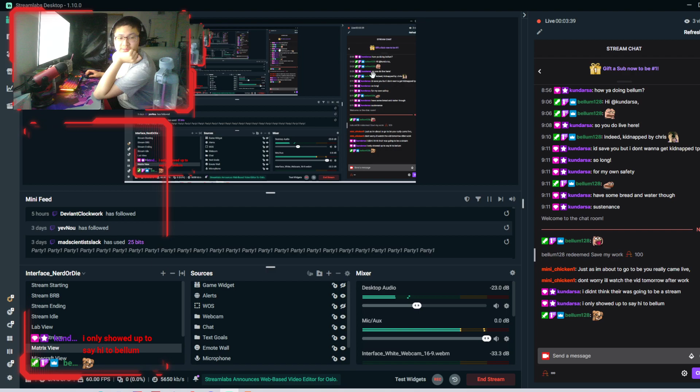There we go, that's the wrong view. That's the wrong camera, I forgot to change my camera. Okay, hi.

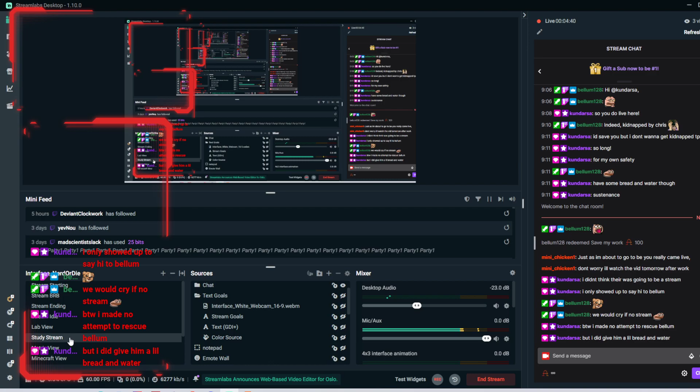Alright, let me just fix my everything. What's going on here? Why am I not displaying the right thing? What is going on? Right, because my other one is using that webcam. Setup stuff be like...

Yes. I'll fix that later. I made no attempt to rescue Bellum, but I did give him a lil bread and water. You're making this sound like I kidnapped Bellum, and he's not here by his own will. Making it look like a bad thing. Why isn't this... okay.

Yeah, change the screen, and then... what do you mean I admit it? Alright, my webcam's in the correct location now, everything's relatively fine. He's gonna CAD a jail cell. Is that what we're doing today, making a jail cell for Bellum?

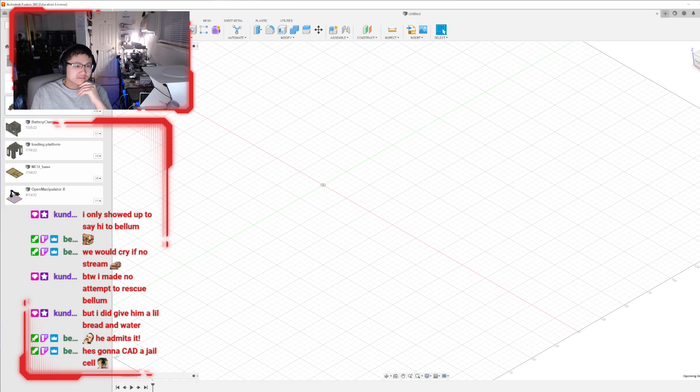Alright, let's say this one thing. I've been trying to get this tolerance right for the past... a lot of days, but it's just not working.

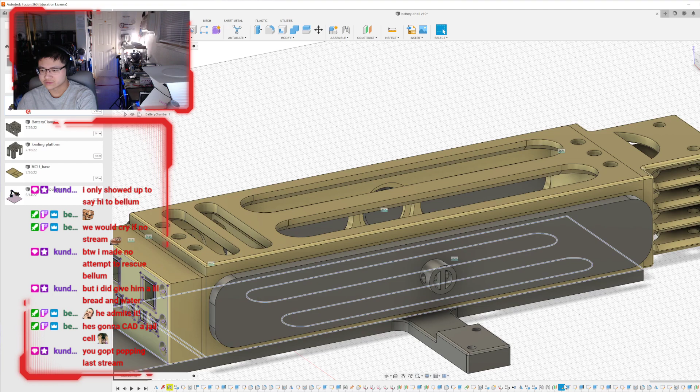I'm gonna go ahead and delete this, and then extend this sketch outwards, I think. I don't know, because here's the thing, right, I need to CAD the battery clamp mechanism, print that, test it, and then expand on that.

You got popping last stream. What does that mean?

Hey TMKDK, how's it going? I ended up not even using VMs, I think we were okay. So I panicked yesterday for no apparent reason, and I also didn't sleep last night.

How did you get by without the VMs? I had TeamViewer running the simulation on like 3 of my computers, and I just let 3 of the students use it. That's how I got around it, and it worked, apparently.

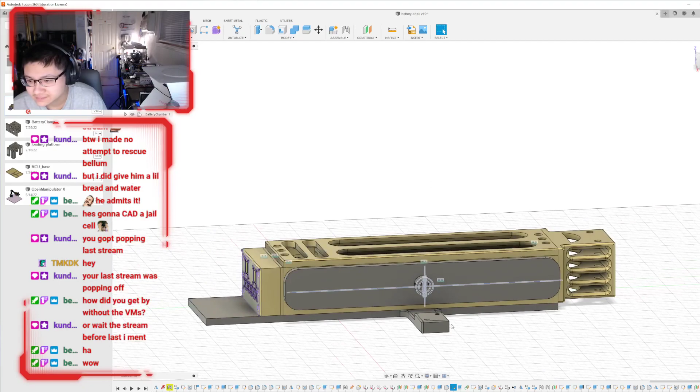Oh yeah, I'm just a bit tired right now. Just a bit.

Where is this plane coming from? I have this sketch here, which is on...

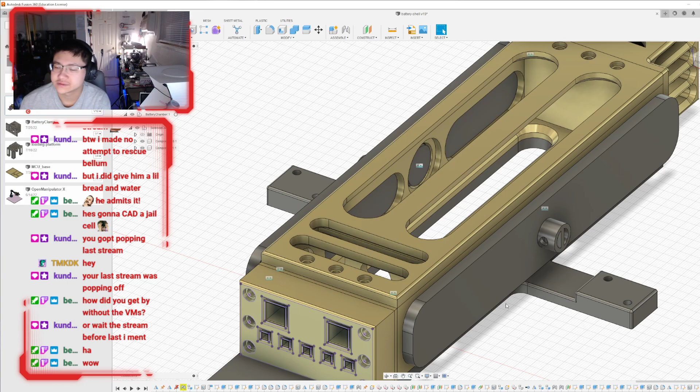Right, I changed time, didn't like that. Okay, so I need to modify this so that it's a little easier for the solenoid to clamp in, because this outer shell is right, but the inner one isn't.

I've printed this thing at least 5 times now, and it's been wrong every single time. 8 millimeters.

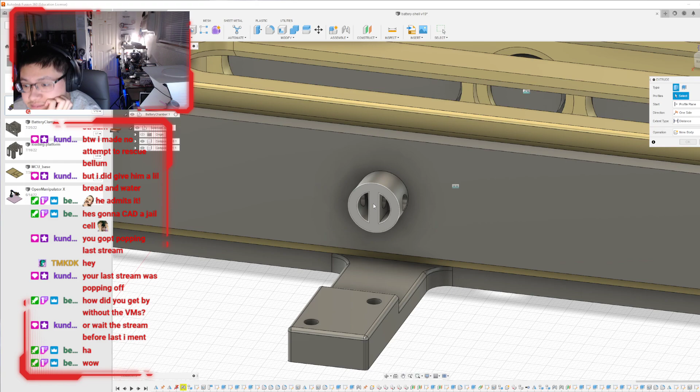I'm gonna move it 3 millimeters forward, I think, and then I'm also going to try to move that hole 3 millimeters forward. This hole should be large enough to fit even the tightest of screws.

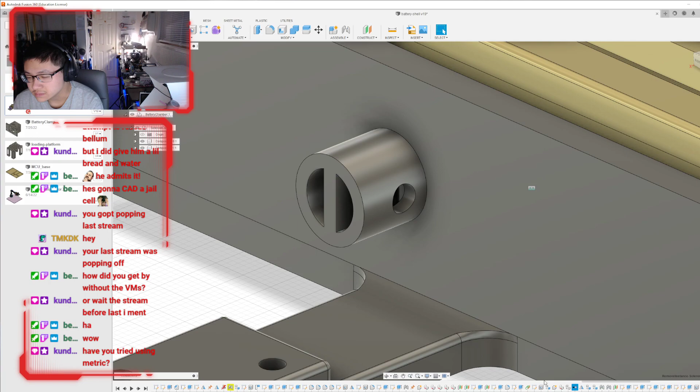You know what, I should have... have you tried using metric? I think I am using metric. Okay, can't be bothered to spend more time on this right now, so I'm going to leave it at that.

I completely forgot about doing a test piece. Should have done a test piece. Test piece is good.

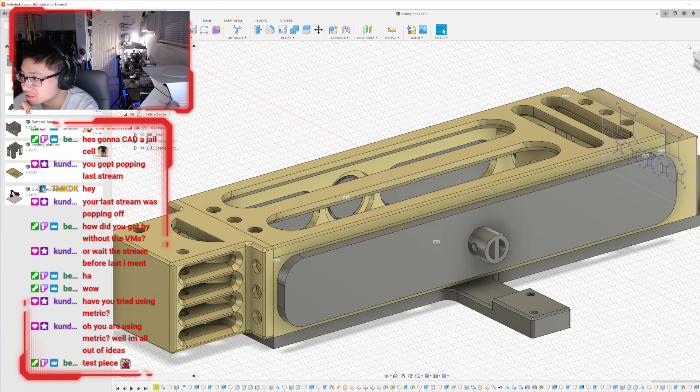Okay, fair enough, I don't even know if this bottom piece fits. I'll have to try that out later.

Okay, next course of action is this part, actually. This is the hard part. So this part, I have to find a way to tolerance this correctly so that this male part fits exactly right with the female part.

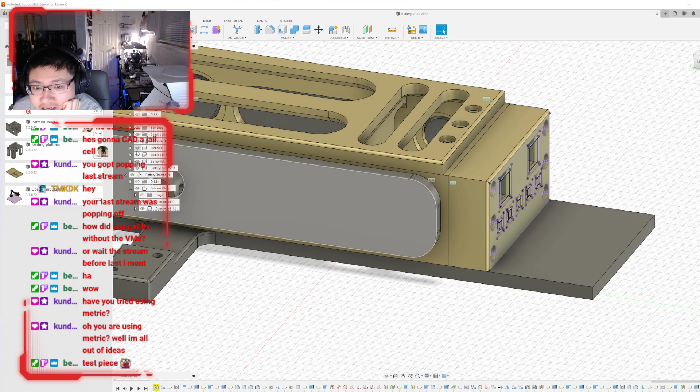Originally, inside the battery chassis, I got the stencil and the main body dimensions exactly correct, like this fits really well. So this stencil has an inner and an outer diameter.

Let me just hide that. The stencil has an outer diameter, or like an outer edge thing. If that's not right, that's also not right, from the top all the way to the bottom.

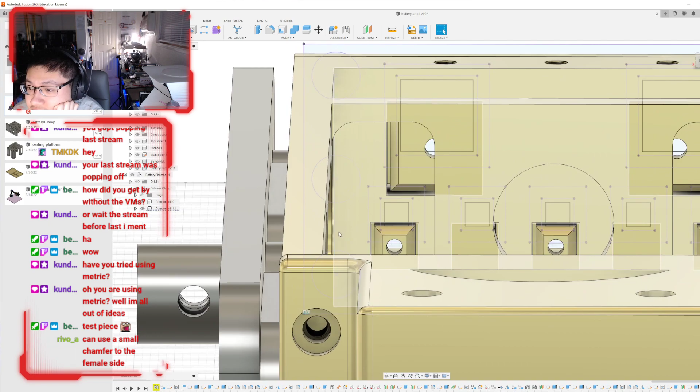11 millimeters, and then if I measure the outside, I get 12 millimeters. So literally a millimeter of tolerance is really good. So I don't know what this offset is. Half a millimeter, I think half a millimeter is still okay. Maybe.

Or maybe the offset needs to be greater. Okay, I'm gonna do this for now. I bought that conductive paint, Bellum, that you told me about, I haven't used it yet, but I can use a small chamfer on the female side.

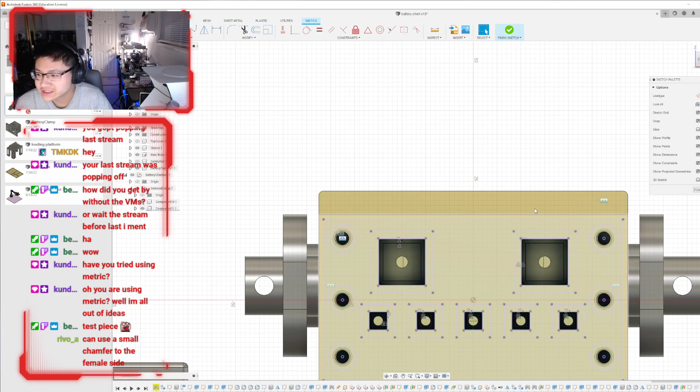Yeah, you're right, I should probably put that on the female side too. Yeah, maybe over here, and on the other side as well.

I've already printed this part, so I'm not going to touch it for now, but at least in the print, realistically it's fine, assembling this thing wherever I have it. I don't know, I have some hardware. I've been printing these things, mass producing them, because I literally don't have time to work on anything else. Let me find the part that I'm talking about.

May have dropped on the floor. Okay, hold on. It's not here, which means it's somewhere else. One second.

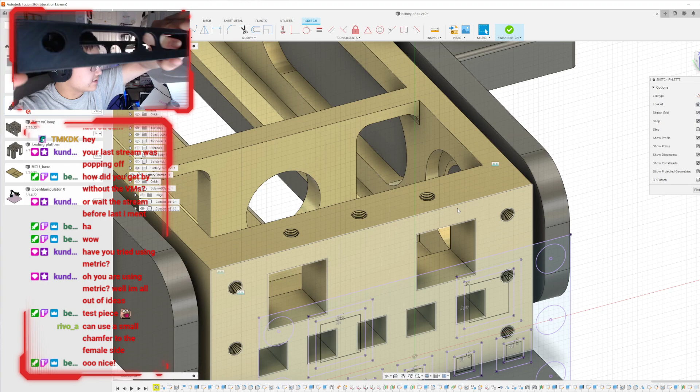So the chamfer on this side would work. I think you're talking about this side, but in general, I think it fits pretty well, just as is. It's a very nice press fit. You see here, I had the correct tolerances initially, which is surprising because I've tried 6 times on this thing and it didn't work. It's very secure, plus it's clamped shut by the outer piece.

I don't think it's really necessary. That's just my opinion.

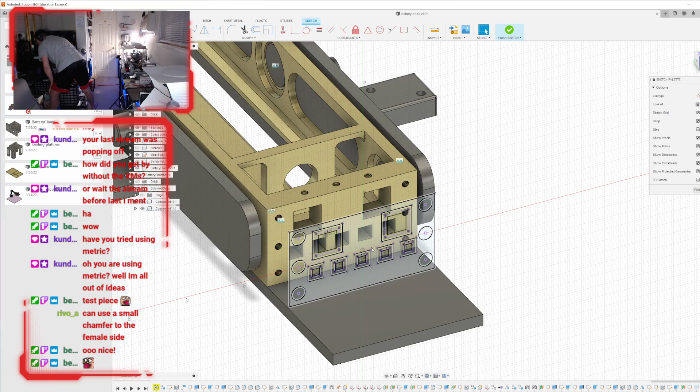Flush. I gotta find that little piece for the other printer. I don't know where it went. I'm printing 8 of these chambers on 2 belt printers, and once I finish these 8 chambers, I have to figure out where it actually went. I'll find out later. I need a better basket for prints on the side. Oh well.

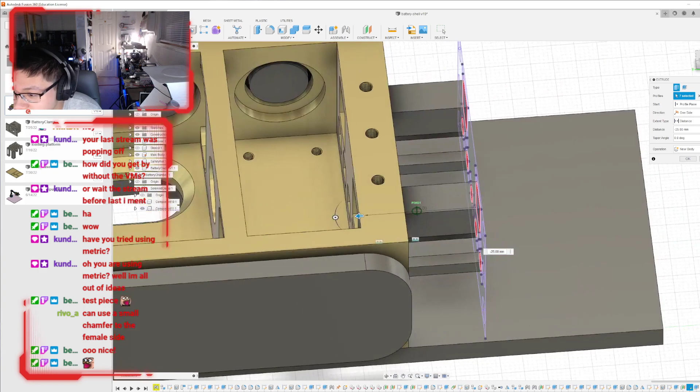Okay, so this side, because it's 1mm in, now we just extrude it to the inside, right? I don't actually know how far I need to extrude this, so I'm just gonna go all the way until it touches the back. 25mm, sure.

Okay, so that's the male part. Now if I put on the stencil, try an X-ray view, you see the stencil basically holds this in place. Just make sure that it's going in properly.

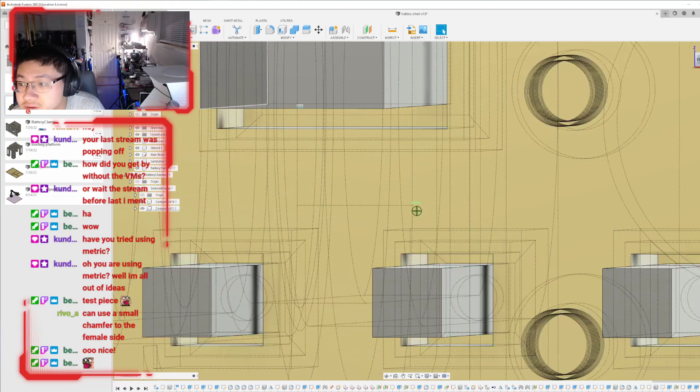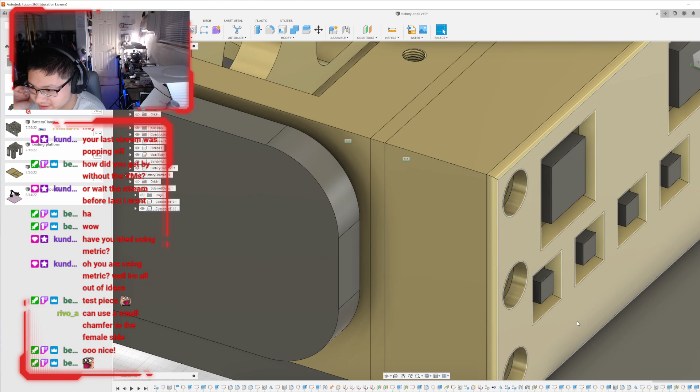It's a small tolerance. Actually no, I want it to reach the back, so I don't care about tolerances in this case. This is gonna be like where it's slotting into anyways. The less tolerance the better, as long as it makes a connection. The huge thing is making sure it makes a connection on all 7 points. That one's the hard one.

Okay, I'm gonna get rid of the stencil, get rid of the main body, and then go ahead and put a small chamfer on each of the sides.

Oh, the robotic arm that's gonna have to do all this really precise placement is gonna have a lot of fun.

So then you just basically coat all 7 of these little pin thingies with your conductive paint. Alright.

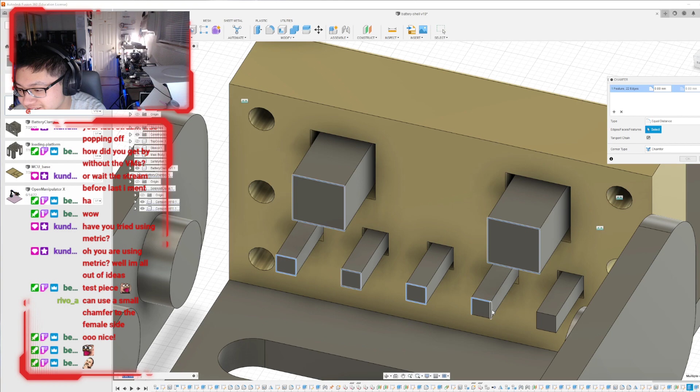Oh come on, oh no. I hate it when it selects everything, you have to do it all over. I think you can just do this actually.

There you go, there you go. 1mm chamfer on the end there. That might be actually a little bit too much.

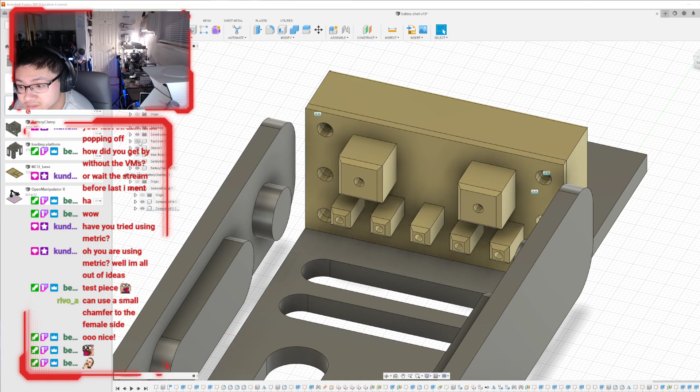It looks fine, that looks alright. 1.41, I think the bottom is a 0.5. I think I went too far. Yeah, I think it is.

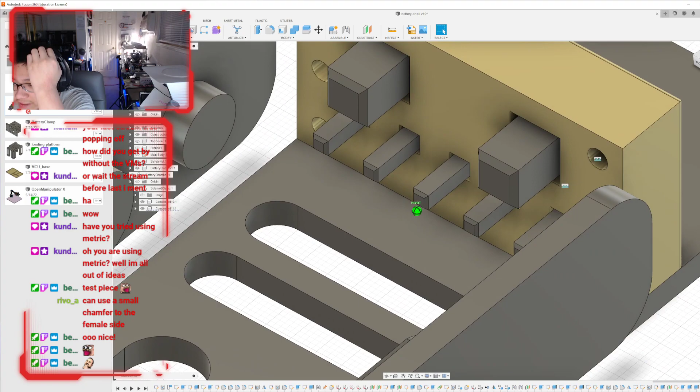That's a 1mm chamfer, and then add a second one. Okay, that looks a little better. And then no hole in the end because this is the male side.

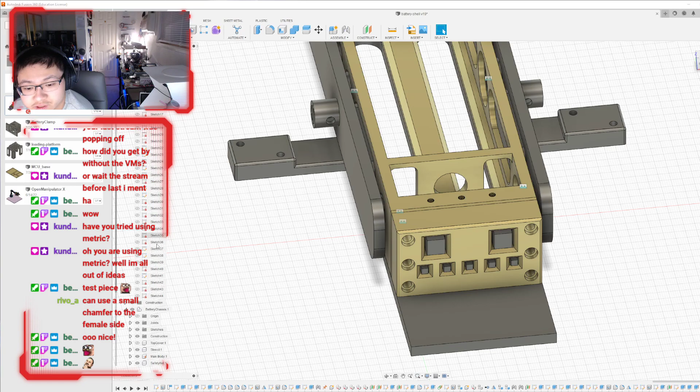Alright, so now that I have that in place, now time to make the other part of it. Should be pretty simple, all I gotta do is extrude this piece here. Just select everything - there's like 3 rings I have to select here of pieces.

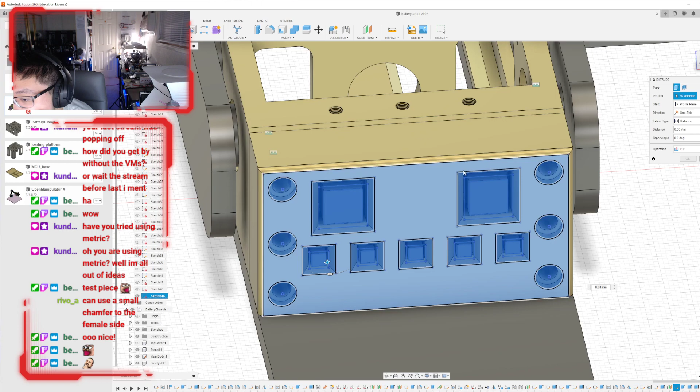Okay, I think I'm going to extrude this piece out in this direction. Oh, actually, okay, hold on, I forgot, I need to make sure that this piece doesn't get cut from the back. Okay, come on, I have to edit the sketch.

These are like onion rings, kind of. I need to make another offset from this line, an offset from the offset, like 2mm. Yeah, so an offset from the offset.

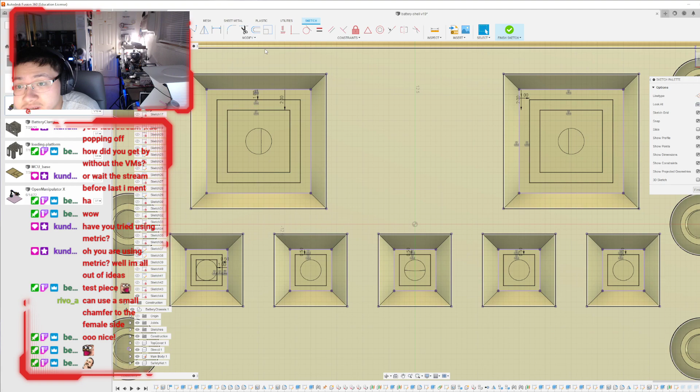And the purpose of this is so that I can attach a wire to the back of this part. Oh, which means I'll probably do need the holes. Yeah, I'll probably do need the holes.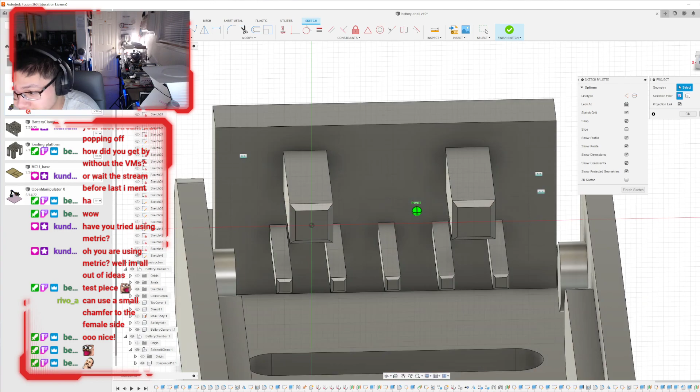Stencil. So what I need to do now is put a hole on each of these ends, so that I can thread a wire all the way to the back, and make basically the whole thing conductive, right?

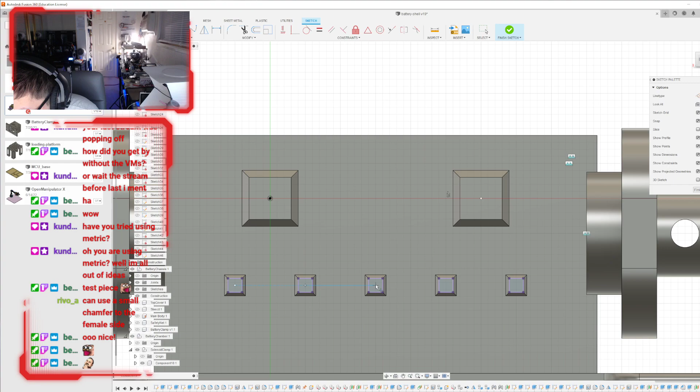So, get a point here, here. It's not doing a thing. Hopefully that's centered for all of them. It looks centered.

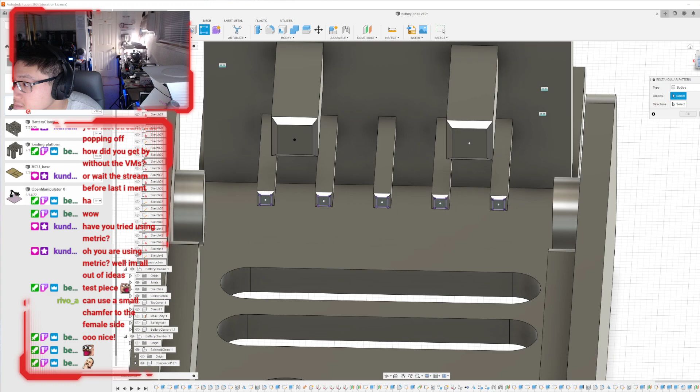Wait, hole. So these go 25 millimeters, like all the way back, but much smaller than that, hopefully. Maybe like 5 millimeters. 2.5 millimeters. Yeah.

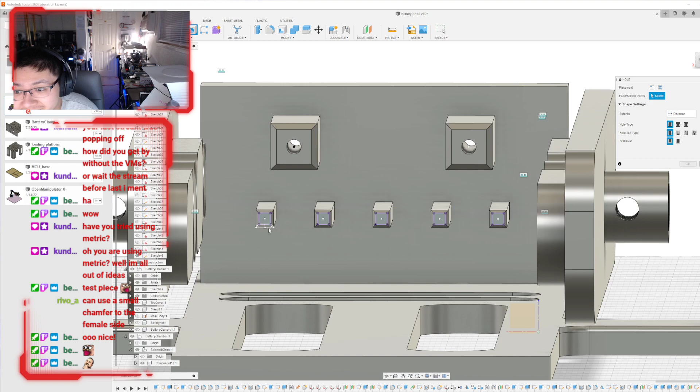You can also thread a thermistor inside of here to measure the battery temperature. Oh, the holes on this is gonna be insane. Check out the holes on these. Ooh, that's gonna be hard to print.

Okay, and then I'm gonna go ahead and apply a fillet to all the inside faces here. Okay. Add another fillet, right here.

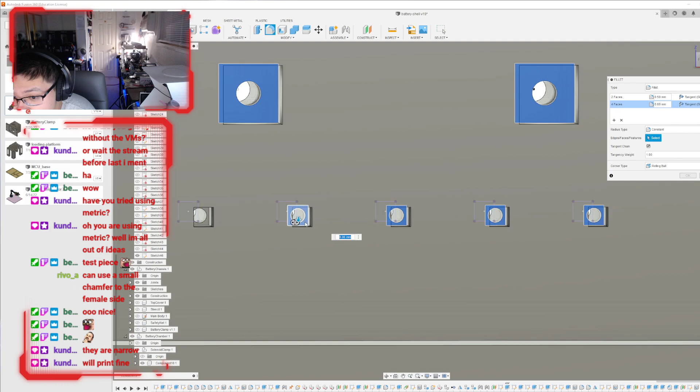So eventually the wire threading isn't going to be that terrible. Okay, and then let's see how deeply I can chamfer this side so that it'll still print correctly. No, don't select that edge.

Oh, look at that. Just think of them apples. Deep chamfer.

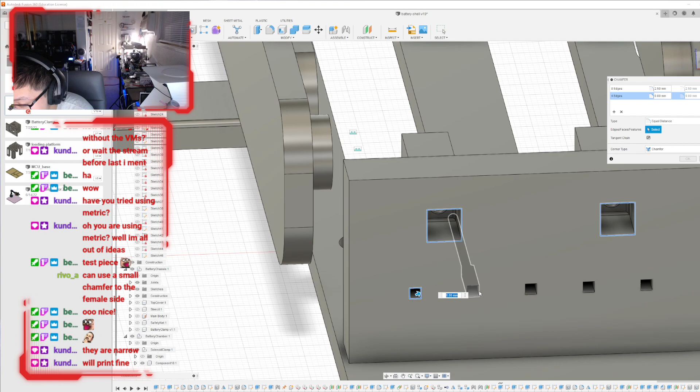They are narrow, will print fine. What about the assembly part of it? Will it assemble fine?

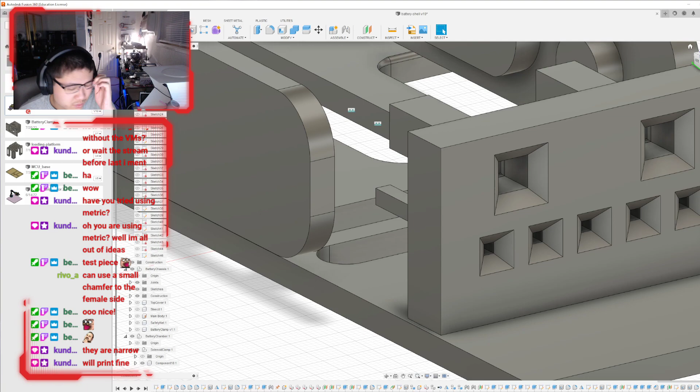So each battery carriage will have a power line. Look at this. So each of these battery carriages will have a power line and a data line. And so all of the circuitry is stored inside the back part, where it maps it back from one of these 5 cables into a data line and a power line. So the circuitry in the back is a little more complicated.

I need to join these 2 pieces. Hold on. But first, I need to extrude this outwards. Always 1 millimeter on each end.

My coordination with like no sleep is absolutely terrible. It's atrocious.

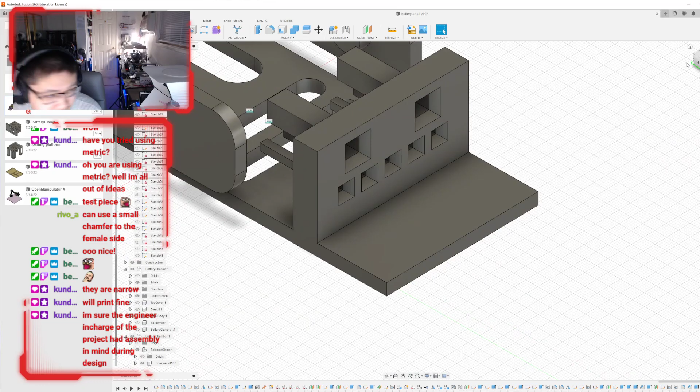So the plan is, I'm sure the engineer in charge of the project had assembly in mind during the design. I'm sure. All right. I sure hope so. So the plan is the battery is gonna slide on in and literally just clip into this piece here.

Tolerances questionable. I'm sure it won't break off at the ends. I should probably put a fillet there or something just to make sure it doesn't break off at the ends. Just a small one, like a universal one, all the way over here. Not that thing. Not that thing either.

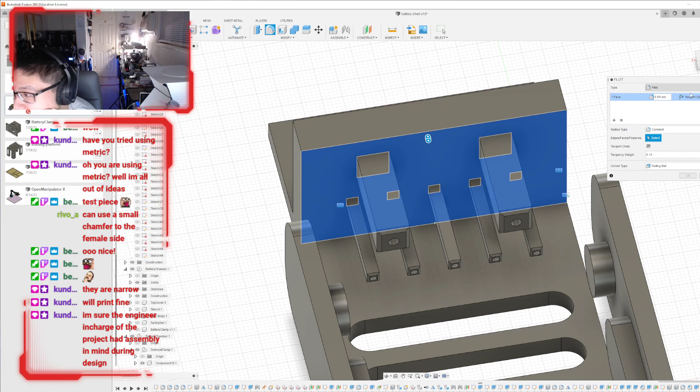Oh, we didn't like that operation. What is it moving? Tangency weight. What the heck is a tangency weight?

Whoa. You know what? Fair enough. Good enough. 2, 3, 4, 5.

I'm sure this will have no complications when I do this later on, when I print this out on Belty. When I have to print 8 of these out on Belty. I'm pretty sure nothing will ever go wrong.

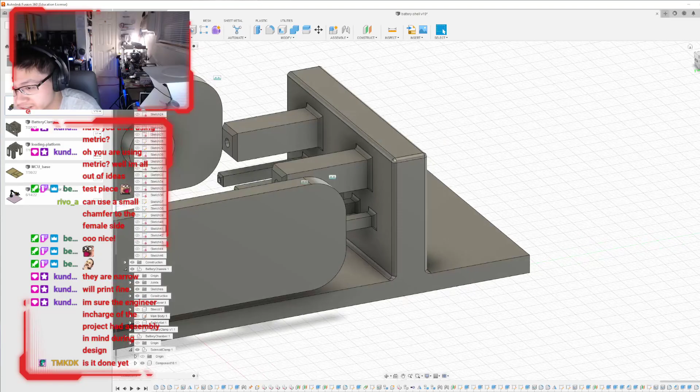Okay, alright. I shouldn't have done those fillets, because I have to assemble the back part now. Alright, so how much space am I giving this thing? 29 millimeters. That's a small area, I gotta say.

So for the bottom part, I think I actually have to be a little bit concerned about the design of this thing, especially not putting this little piece there on the front so hastily like that.

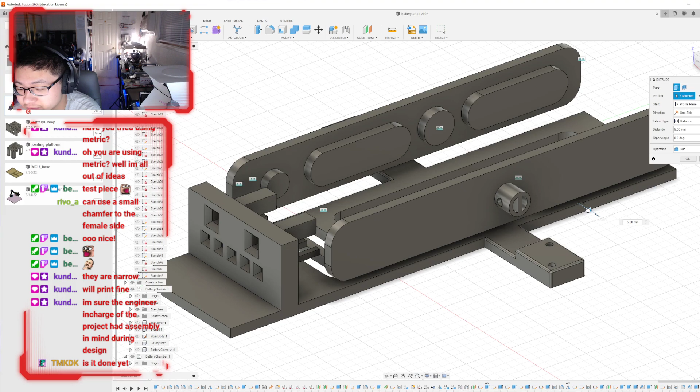Okay, the reason I did that is because I need to add some supporting structure to this battery, and I'm very not sure of how to do this. I do know that I'm going to need some sort of extrusion on both sides. I'm going to see like the pinnacle of additive manufacturing at this point here, in which I literally go ahead and move these 2 sides outwards by like 5 millimeters to create a wall for it.

Is it done yet? No, it's not done yet, TMKDK. Much to your dismay, it's not done yet. So I'm going to extrude it by 5 millimeters on each side, give it a bit of girth. I don't know if girth is the right word.

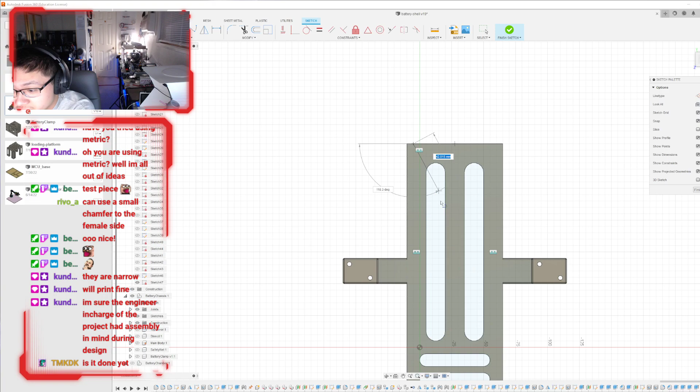Okay, and then I know that each of these things are like exact prints, and I didn't account for tolerances at all. So nothing will possibly go wrong if I go ahead and just make a sketch, make a line from the top, extending all the way to the bottom here. And the dimension is 4 millimeters away, giving it 1 millimeter of tolerance from the edge.

Nothing will absolutely go wrong if I repeat the same thing on the other side. Dimension it 4 millimeters from the edge, thereby giving it 2 millimeters of tolerance. So in order to slot the battery into the battery chamber, you literally have to do it within 2 millimeters of tolerance. No pressure.

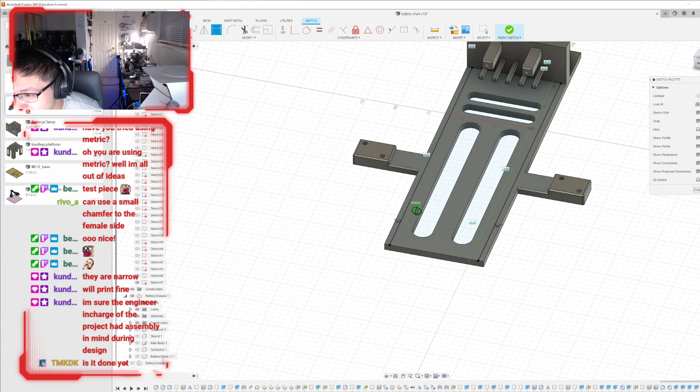I don't actually know if this is gonna work. I should probably give it more tolerance. Okay, hold on, I'm gonna give it more tolerance, because the robotic arm has to actually put it inside of this thing. Let me give it 10 millimeters in the end.

Is this thing even printable? What is the width of this thing? Barely. Barely. My Belty's gonna hate me for this, but it's barely printable. Everything's printing on Belty. Everything's relying on Belty. I sure hope Belty doesn't break.

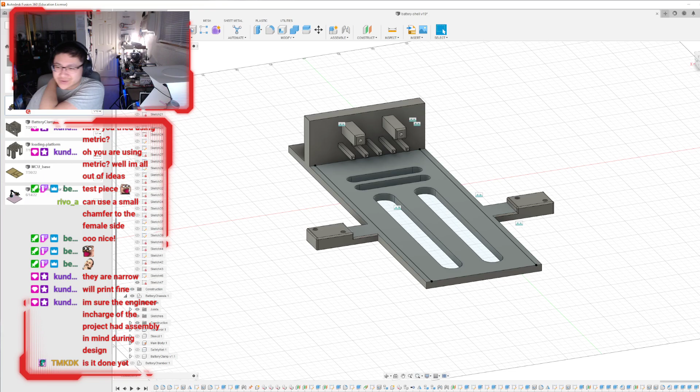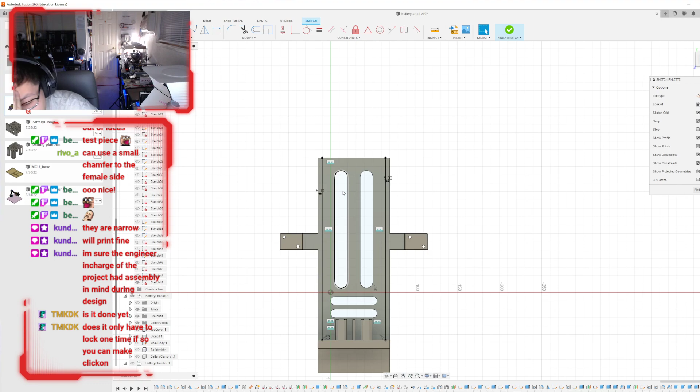Okay, so now from the end, if I give it like 5 millimeters from each end, that's 10 millimeters of tolerance, which means... No, I need that tolerance to exist, or else it's not going to slide into the things correctly. That's why these are going to be there.

Right? Let me give it 6 millimeters, 7 millimeters. Okay, it's going to have 6 millimeters of room for error, and then hopefully that 6 millimeters isn't enough to stop it from... Okay, I'm going to give it even less. 7.5 millimeters.

I'm going to tell myself that this is because the walls need to be thick enough in order for the battery not to fall out of the sky while it's doing its thing. I'm going to tell myself that.

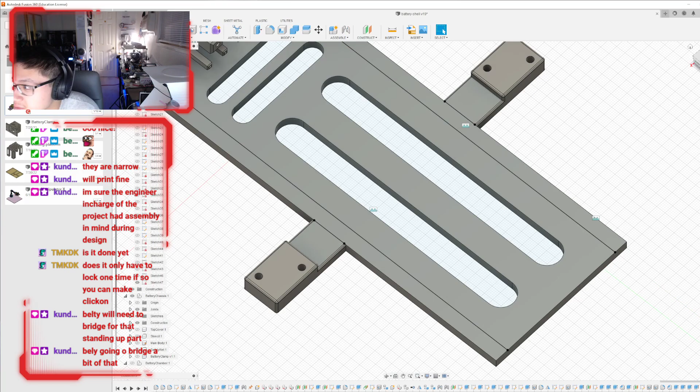I'm sure these walls are not going to conflict with the fact that there's a locking mechanism here. That's literally... oh my goodness. That is a very non-existent tolerance you got there.

Alright, hold on. 3 millimeters. No, 4 millimeters. Okay. Yeah, should be okay.

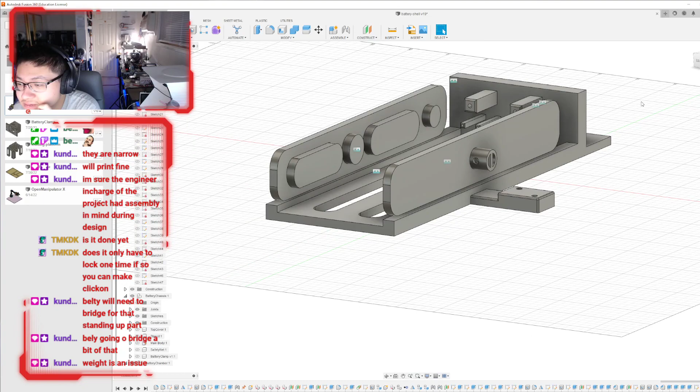I forget that I can mirror stuff to the other side. I don't like doing this sort of juggling back and forth. Is this the exact same height? No, it's like almost.

Okay, now it's the exact same height. Now I can make another extrusion.

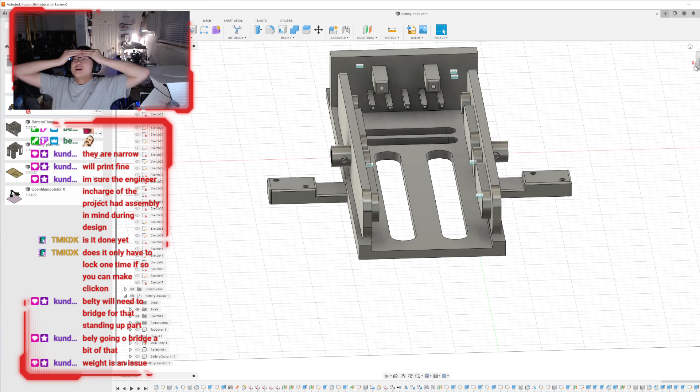So the top face of this cage will be the exact same design as the bottom, which I'm not gonna actually use as the bottom design. I should probably redesign that.

Yeah, okay. I am piecing this thing together, guys. I am in stitches, I'm piecing this thing together. It's going, I'll tell you that. It is definitely going.

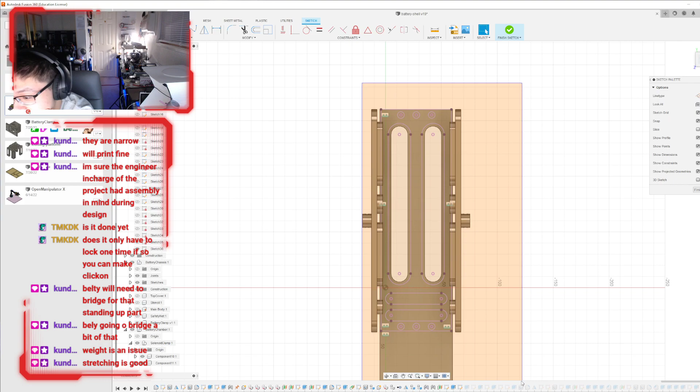Yeah, I don't want any of this. No, delete. Bad. Out of here.

I'll keep the sketch, why not? No, wait, I just, hold on. I deleted the wrong thing. I just realized. Redo. Oh, undo my deletes, undo my mistakes. That was not the right carriage.

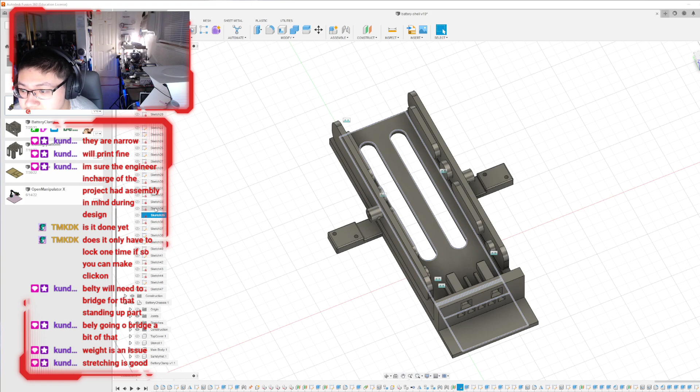Okay, where the heck is the sketch I made for the bottom? That was the top. That's for that, that's for the other one. This one. Okay, yeah, I get it.

Oh, that's not good. That's not good.

Attempt to touch your toes for 10 seconds? Oh my goodness, that is gonna be hard.

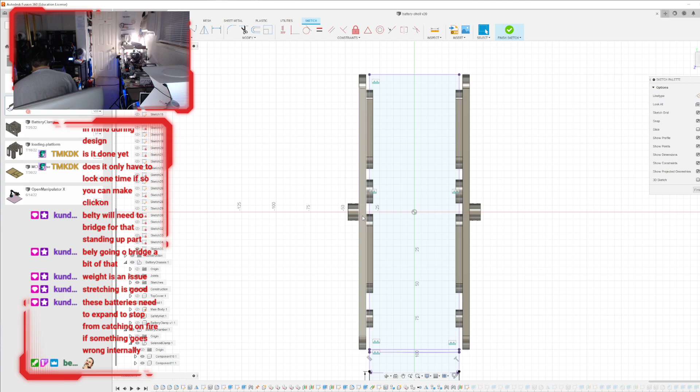Stretching is good. Those batteries need to expand to stop from catching fire if something goes wrong internally. They do have room to expand - like, they barely have room to expand. I placed a little bit of tolerance in there so that it allows for expansion. It's not a lot, but it's there. It's evident, you gotta trust me on this, Narset. I'm not intentionally blowing up my batteries.

So that's why I put a little bit of a design in order to prevent the batteries from completely being squished in there. So, demonstration. They need to bust the seams if they need to. Okay, that's a weird way of putting it, but you're not wrong.

I totally didn't give it 1 millimeter tolerance on the actual design of this thing. Totally not.

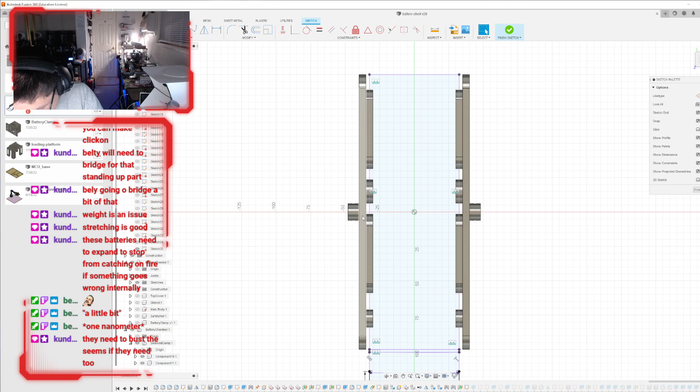Oh, I have a meeting this Friday. That's my last meeting. Okay, yeah. I have to finish this CAD design by Friday.

So this is the battery. You know, if it blows up or something, this little cap has a small lip here that allows it to fit directly over the battery, therefore giving it like a millimeter tolerance.

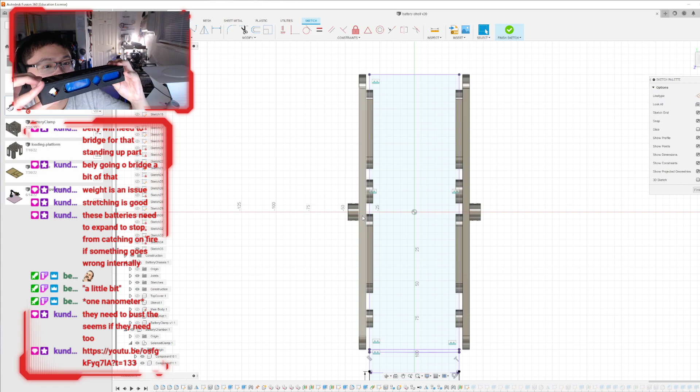Hold on, this thing needs to fold in on itself. So it's not a lot of tolerance on the top, but I can screw it together, and then the middle can expand if it needs to. And then also, you can wiggle around on the inside as well.

So it has a little bit of tolerance on the left and right. Basically, it can expand if it wants to, by pushing on the plastic.

I bought a bunch of screws to screw this thing together, by the way. I hope it works. Engineering at its finest.

I should probably test the screwing out. I should probably screw one of these things together.

What is this video? I've seen this video. I think it was one of the first things I watched while I was studying for this project.

I need to screw one of these things together eventually, just to make sure the pod's still right. No. Maybe I'll do it right now. You know? Okay.

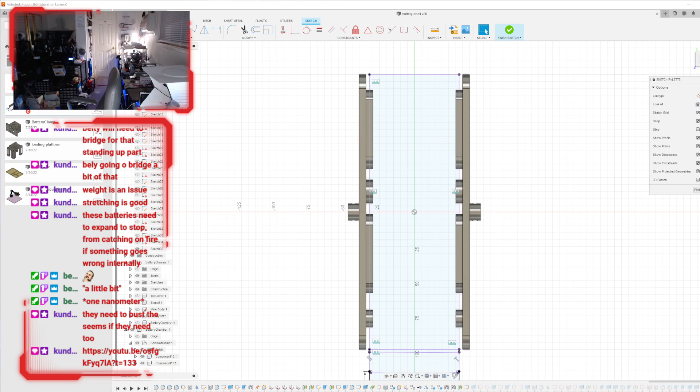I'm gonna get one of my battery chambers and screw it together to see if it belongs to it. A bunch of my screws from McMaster-Carr came in today. I bought like $100 worth of screws for reasons. So I'm just gonna pick one off.

Hey, why is my camera so zoomed in? What are you guys seeing right now? Oh. You know what? Oh. Oh.

Okay, welcome to my lab where I screw things together on my table. Hopefully you guys can see that.

Alright, so I'm going to put this thing together, and I don't remember what screws I needed, but I have them all on the floor here. I bought a bunch of screws for this. So let me just check my notes to see what screws I need.

Okay, so I need 3 M3 by 12 millimeter screws. So 3 M3 by 12 millimeter screws.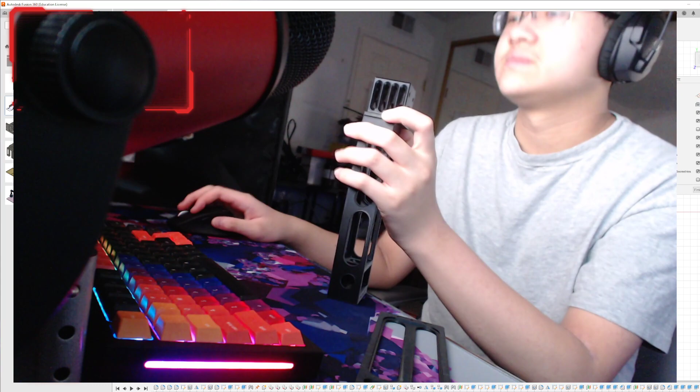Where do I put them exactly? I'm not sure. I think I'm gonna assemble the top part first. I don't remember what screw this is, I'm gonna have to check. I think it might be an M3 by 12. Or it might be shorter - it might be M3 by 6.

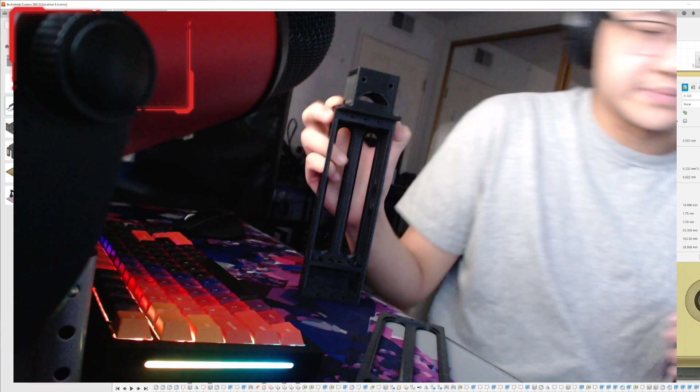It is M3 by 6, I believe. Yeah, M3 by 6 millimeters. Bunch of these. Let me get my drill, and hope my drill doesn't run out of battery on me today. Oh, this is gonna be fun to put together.

Oh, stretches, right. I completely forgot. Okay, hold on, I gotta do my stretches first. I gotta attempt to touch my toes for 10 seconds. Thank you for reminding me, Clarissa. I completely forgot because of how much I didn't want to do it.

Now, for the record, I can't touch my toes because my legs are just too stiff. My entire body is just too full of lactic acid in order to do anything correctly. So I'm going to give it my best attempt, alright? Just deep breath in. That's the best I can do, Larissa. 1, 2, 3, 4, 5. Oh, I can feel the burn. 6, 7, 8, 9, 10. Ow.

How long has it been since you stretched? About 3 years, approximately. Or approximately the last time I took a PE class in school, which was around like 6 years ago. That has been the first stretch in a while.

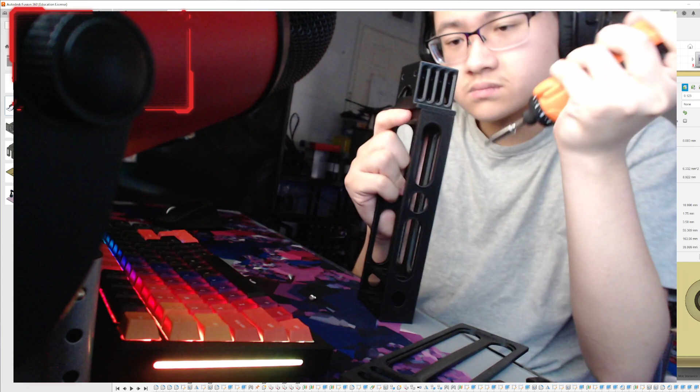I mean, the tolerances are pretty good, and I'm not gonna lie, I think I did a pretty good job with tolerances on this one. At least in the screw department.

Screwing things in is the favorite part of any project. I'm so glad I got this electric screwdriver. It's been such a worthy investment. Worthy investment right here.

Ever since they said PE was optional in high school if you did marching band instead, I went ahead and picked the most least exercise intensive marching band category thing that there was, which was pit. And I basically didn't do much exercise after that.

The dodgeball. I haven't played dodgeball in such a long time. I used to be so bad at it. If I ever successfully start the business, I will make mandatory company dodgeball, and we'll all hurl things at Bellum. Is hurl the right word?

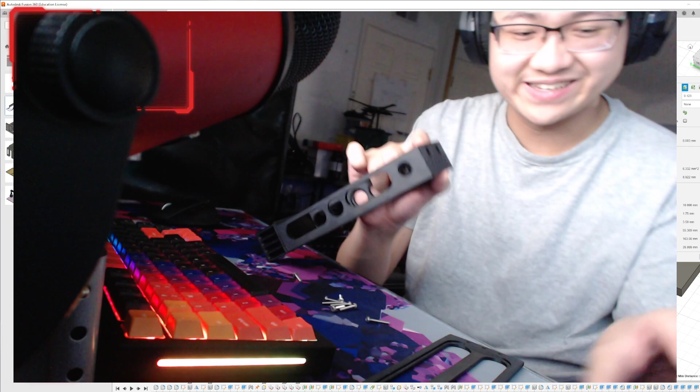Now I have the fun job of sticking this really long screw throughout the entire thing. Okay, so line it up.

These screw heads are like really small. Where's my screwdriver? I had a screwdriver. Here it is. I think it's too big though. No, it's all the way in.

I probably shouldn't be putting them all in at once, because I know that's like bad practice or something. I should be screwing them in partially and then screwing them all in later.

Bellum, don't worry, I'm gonna give another workshop on screws next semester. These engineering students need to know about the versatility and functionality of screws in 3D printing. Also, that just reminded me, I should probably start planning for workshops next semester again. I've kind of just been ignoring that while I did everything else, so...

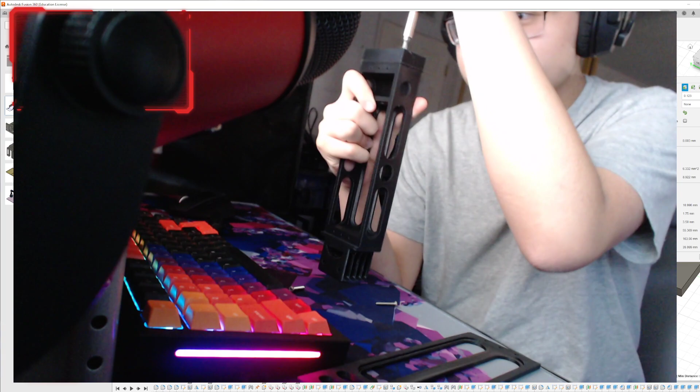These screws can be taken out, right? They absolutely can. Screws. And that was just proof of concept to make sure it worked. Everything's proof of concept. Alright, now for the last one.

It's 10:11, so I'm gonna head out in a bit. I think I have to make a lecture for tomorrow.

You can get inserts from metal screws, just saying? Nah, you 3D print them. That's the fun part. You 3D print them and hope your 3D printer tolerances are good enough.

Oh, I also have to test the tolerance for whatchamacallit. Okay, what screws are these? M3 by 12, I think the top ones are 12 then. Maybe. What is the depth on the top?

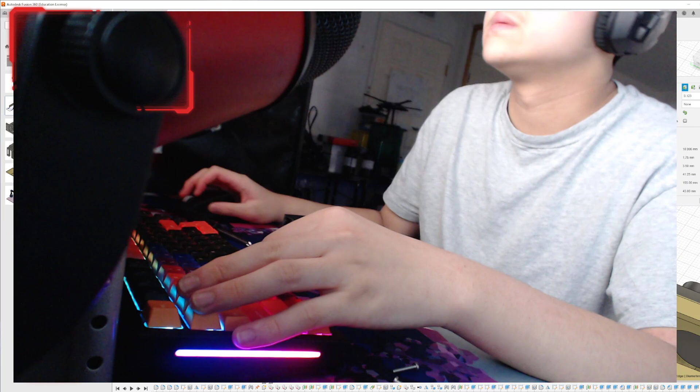That was not the correct measurement. From the top. 6.004. What? Really? It's M3 by 6? Okay. That's how deep this thing is? Ah.

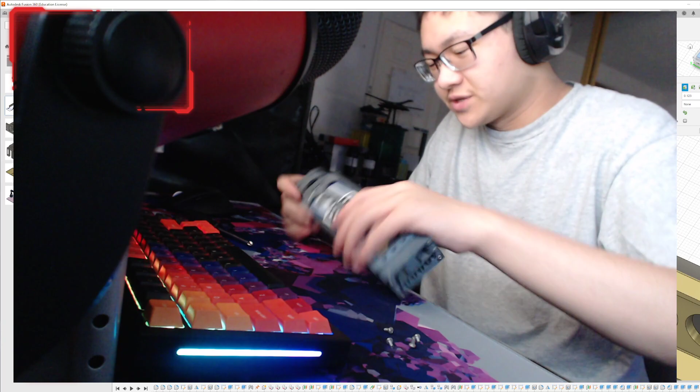I kind of don't believe that. I half don't believe that. I think it should be 6 down there and like 12 up here. Well, let me check. I was right. It was 12. Or I may have just drilled it all the way inside for no apparent reason. No, it's 12. Okay, it's 12. My drill is out of battery, guys.

I have to charge this thing. So the top is 12, but the bottom is 6. I know this because I made it so that the bottom wouldn't penetrate through the charging cables and stuff like that. Oh, screw fell in.

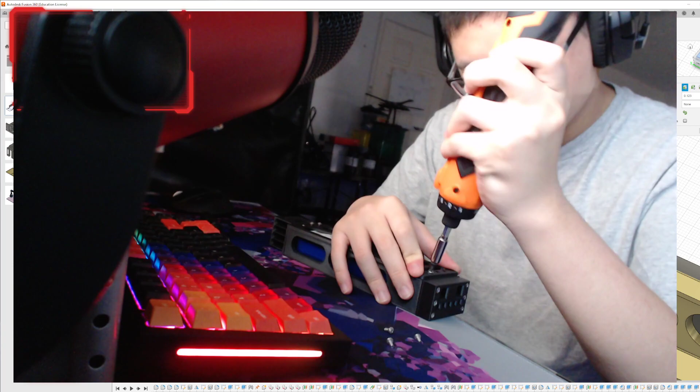The heck? Oh please, we're so close. I think it's dying out on me, guys, it's running out of battery. I think it's out.

Do you know the difference between a plastic screw and a wood screw? No, but first impressions are one is plastic and one is wood. Oh, those look fun. Yeah, I should have gotten those. Are these cheaper than what I got?

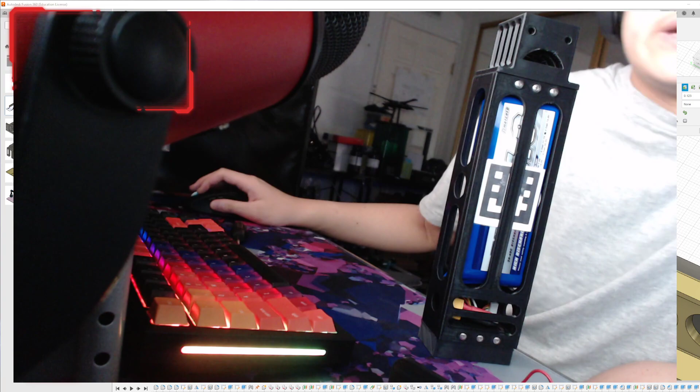Good, battery, boom. This was done way too long, I should have done this in a week, but good progress for now. I need to make the chassis for it, the holder, and then I need to make the rotational battery chamber with the wheels and everything, and then I should be done.

Now I want Sloppy Joe. Oh, it's Sloppy Joe, I said Skippy Joe. I am just not being able to read tonight.

Okay, I think that's enough streaming for today. I'm gonna go redesign, stop the printers, redo that, and then I need to find a way to get this back tolerance right because this screw is really bothering me.

I don't know what a Skippy Joe is either, though. I wouldn't know, I need sleep. I think the common theme of me just screaming and doing things is I need sleep. Sounds like something local Fafa would cook. Maybe. Alright, to Kenshi we go.